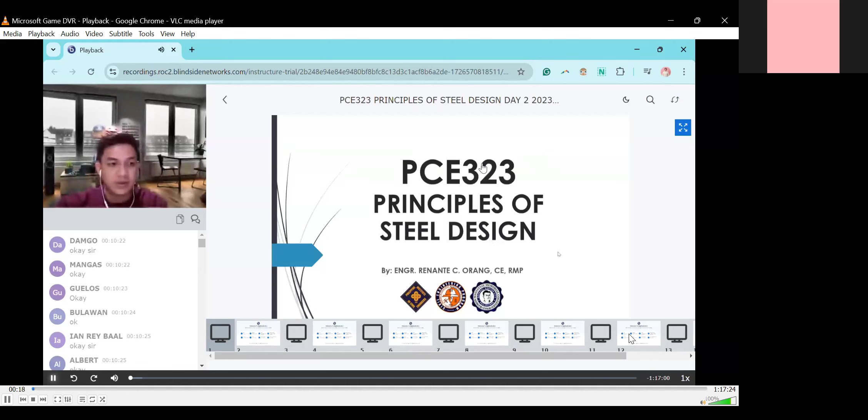Our first topic is shear stress in beams. So we have shear stress and bending stress. You know the difference between the two, but let's start with shear stress.

First is what we call general shear stress, also known as actual shear stress. That is the stress occurring when it comes to shear within that section - the actual stress present because of our weight, self-weight, and the weight that our beam is carrying. It can be uniformly distributed, uniformly varying, or point load. Because of that load on top, we get stress.

Stress is force over area, right? Basically force over area. So for shearing stress, that is VQ over IB - that is our actual shear stress.

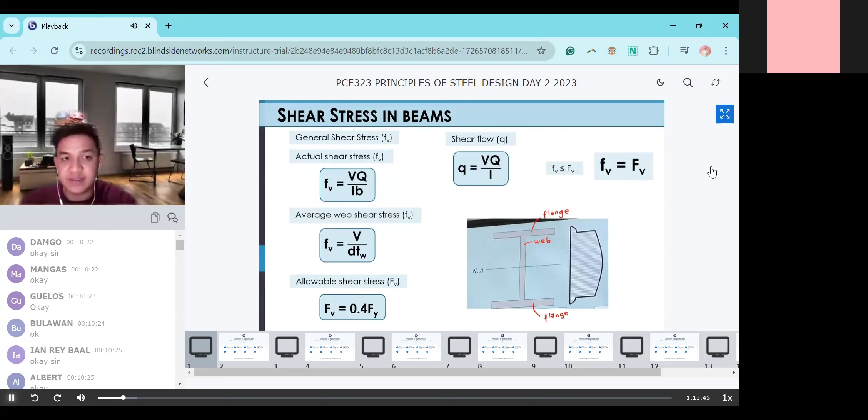So average web shear stress is the stress occurring to our web only. That is V over D - depth times thickness of our web. For actual shear stress, again depending on where you are analyzing, that is VQ over IB.

The problem is, what is the meaning of Q? When you solve it, you'll need this. You know the formula VQ over IB, but you don't know what Q is. Q, class, is A times our Y.

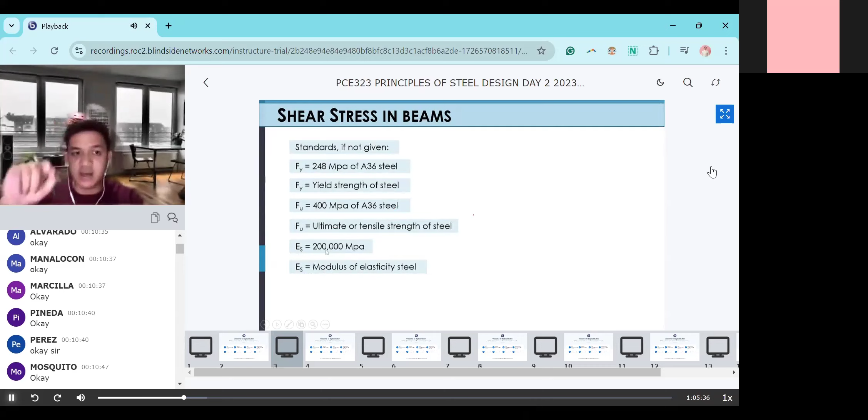Next one is our modulus of elasticity, that is our ES, or in some books just E. This is 200,000 megapascal.

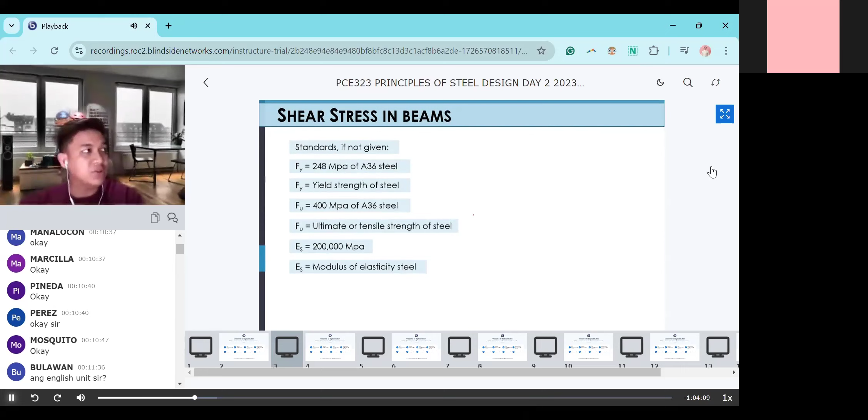So let's proceed. For point load at the center, our maximum shear is P over 2, which is occurring from our supports.

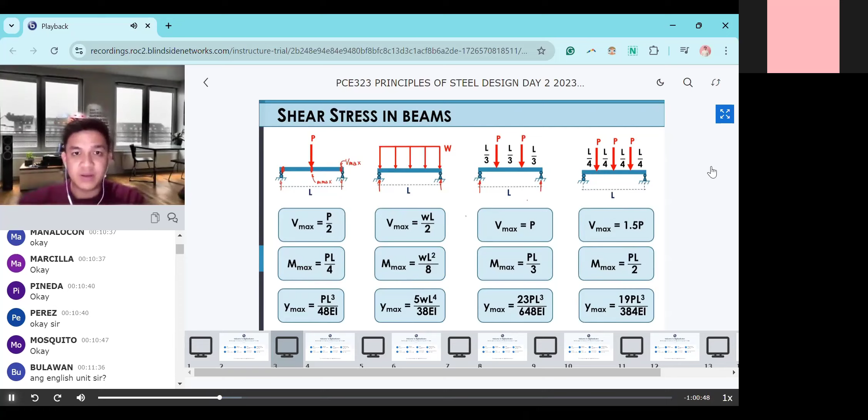Let us proceed with our first example, to apply these formulas. So, a wide flange section has the following properties.

We have BF, which is the length of our flange, base flange. Then thickness of our web, that standing part. Technically the figure wasn't given, so you should know what BF, TW, TF are, since you'll need to draw it yourself. The basic idea is the flange is the top and bottom, horizontal, while the vertical part is our web.

Let's proceed. Thickness of flange is 12mm. Depth, overall depth, is 300. Then IX, inertia in our X, is 108 times 10 raised to the power of 6 millimeter raised to 4.

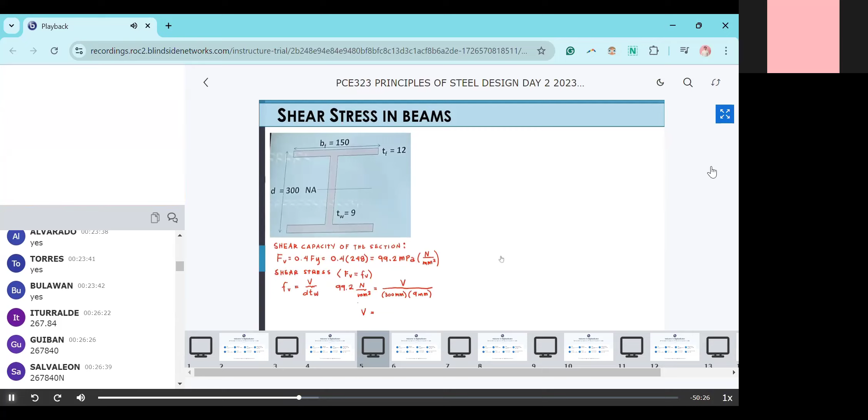Ayan, so based on this, paki-shift solve, what is our V? Ito yung unit ha, para masanay mo. That is 267,840 Newton.

Or pwede natin, for example, sa ating choices, walang Newton, nakakilonewton. So that is 267.840 kilonewton. Siyempre, this will be our final answer. Ayan, final answer. So shear capacity, again, is a force, not a stress. So kilonewton or newton dapat ang answer. Okay, so that's it, proceed tayo, that is for number 1.

Okay, let's proceed. Next: determine the safe uniform load that the section could carry if the length of the beam is 8 meters. Tara na, so nakuha natin yung V na pwede sa kanya is 267.840. What if daw yung ating I-beam is 8 meters? Ayan, 8 meters. Then syempre, meron siyang kine-carry na uniformly distributed load, so what is that safe uniformly distributed load?

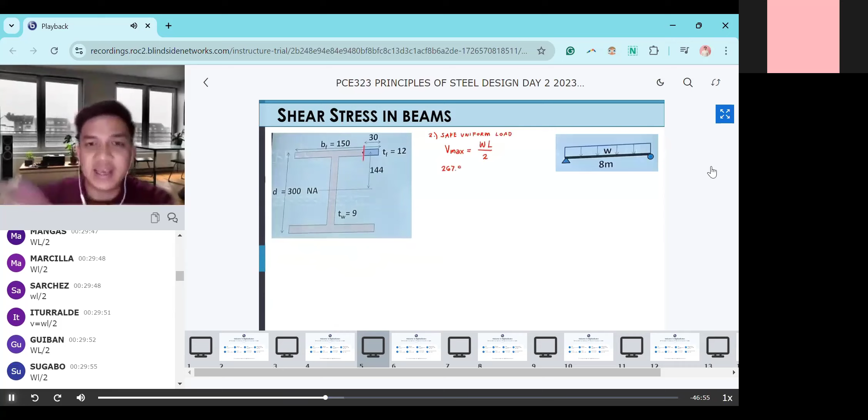We have 267.840 is equivalent to, ito na kong unit ha, kilonewton equals W, length natin is naka meters, 8 meters, tapos divided by 2. What is our W?

Yes, ayan na, even though na nasulat na nako, pwede ragyapon mo mag-type. That is 66.96 kilonewton per meter, that is our final answer. Okay.

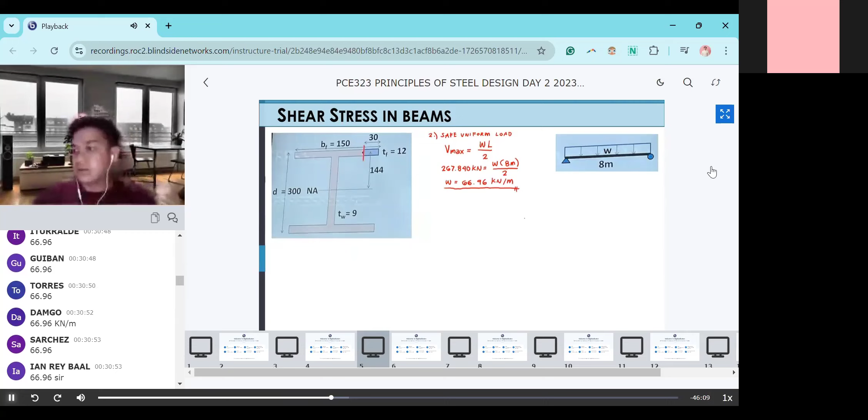Basa akong script. Ala, gilipiwan akong screen kay pangit ang pangit siya sulatan. Okay, sige. But that is our answer.

Number 3 na tayo: determine the shear flow of the portion of flange 30 mm from the edge. Ala to ara, English pa yun. Shear flow, diba? So yung drawing natin from the edge of our flange, again, ang flange is eto, tumoy ba sa taas? Flange, web. So from our dulo or edge, 30 millimeters, so what is the shear flow?

Okay, sulat natin number 3: shear flow at neutral axis. Ay, number 3, swap, okay sorry. At the shear flow of the portion, swap din akong sulat, of the portion, 30mm from the edge. Yan, that is number 3.

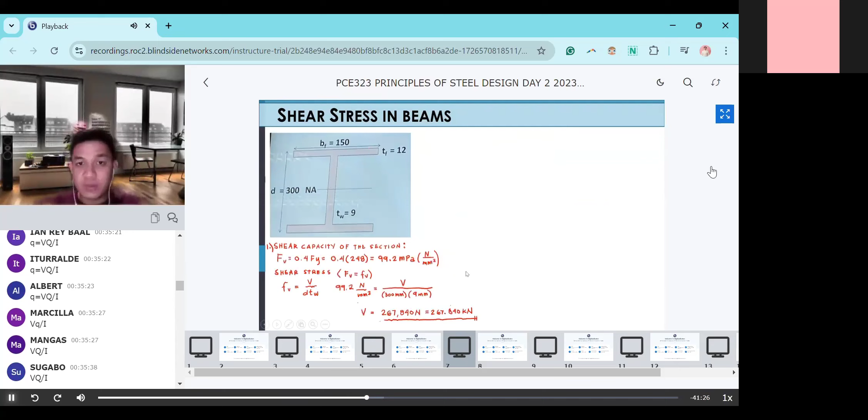So if you are talking about shear flow, class, we have our shear flow diagram. Ibig sabihin, ito yung stress when it comes to our shear of our I-beam, no? As you can see, kani baga manggod siya, taas siya ba, baga siya kung pa-horizontal. Siyempre, maliit masyado yung shearing stress dyan. As you can see, ito yung zero natin na part, 0.

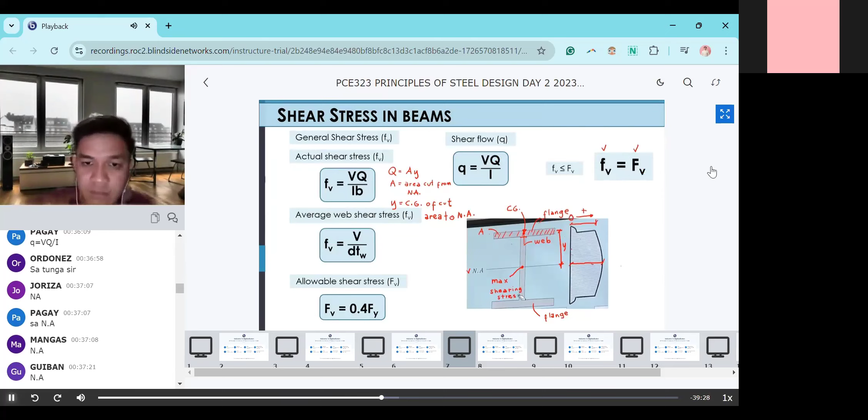That's your clue for next, if you know where. Yes, at the neutral axis. Okay, let's proceed again. Let's start with shear flow at the neutral axis. We have VQ over I.

Our Q, class, that is area times Y. But in number 4, the Q was already given, right? Here, Q at the neutral axis is 380 times 10 raised to 3. So that's what we'll use.

And this is also our final answer. And we're done with example number 1. Numbers 5 and 6, that is your practice problem, so you need to practice that one. Then maybe next time, we'll go back to it if we have time. Next meeting, not right now.

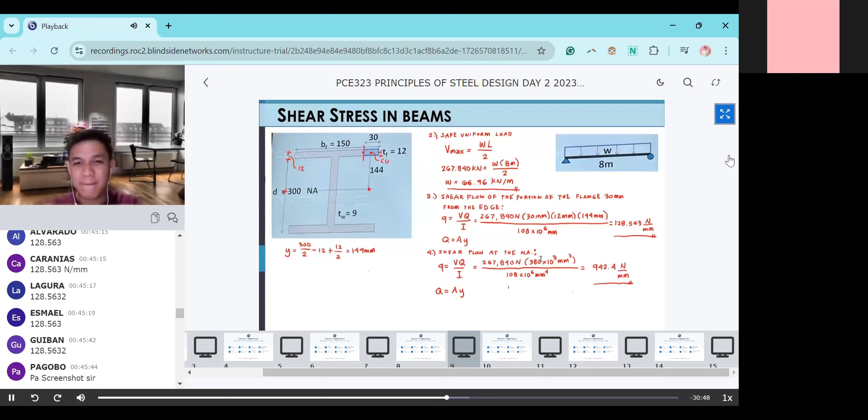So a simple beam has a span of 12 meters and supports a superimposed uniform distributed load of 20 kilonewton per meter. This is like the self-weight or the load that the beam is carrying.

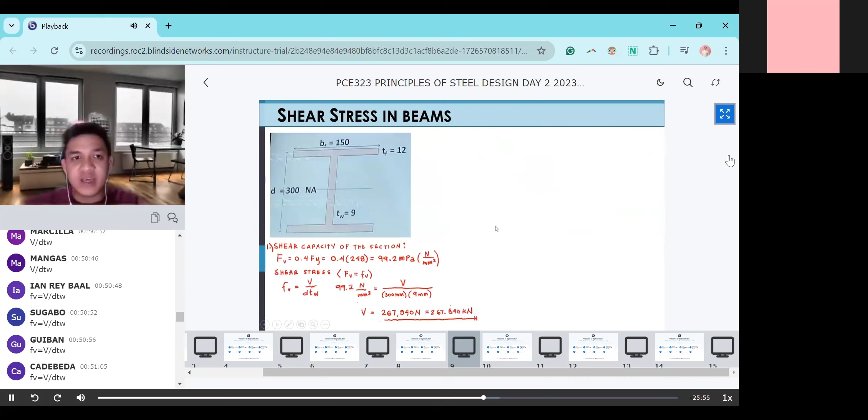When we say average shearing stress, please type in the chat box, what is our formula? Yes, that is FV, actual, equivalent to V over d times tw. So what we're missing here, we cannot proceed because we don't have the value of our V. Again, average shearing stress means actual, not allowable, actual.

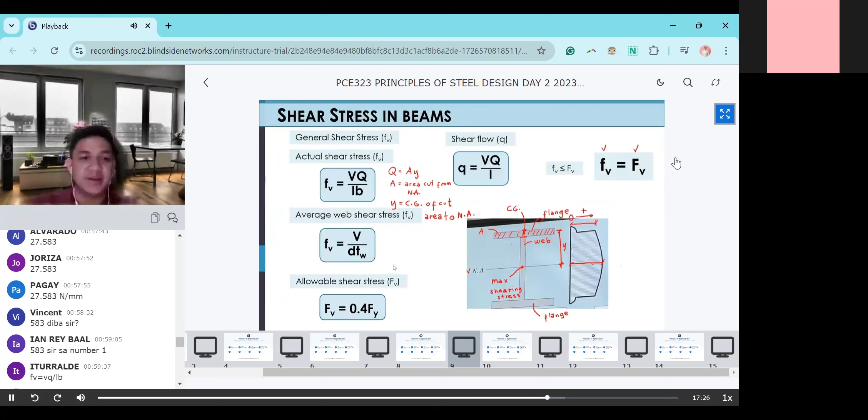Apas, that is VQ over IB. Number 2 na ta.

Maximum shearing stress. So, ang maximum shearing stress natin, class, is small letter fv is equivalent to VQ over IB. Wala na, unsa man eh. Sa kuha ni class, slide akong screen. Ayan, so VQ over IB.

Problema, meron na tayong V. Kaya na ka ng V. Kaning V na to, ganina, pwede na na, 124.112. Ang Q, wala pa. Then yung I natin, meron, no, gatag man. IX ang gamiton, dili IY ang gamiton. Within our x-axis atong irespetuhon.

Okay? Tapos, B is, kumbaga, kung saang thickness sa web. So, mo ng G's lang na siya. So, ang problema dito is yung Q natin. So, Q sa itong unahon para dito maglisod. Q is equivalent to, wait lang ha. Kanang oily na akong screen. Q is equivalent to A times Y.

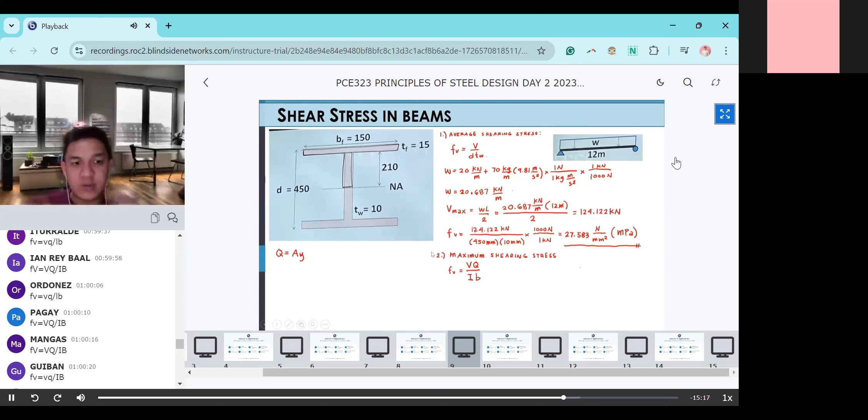Then syempre, maximum shearing stress tayo, diba? We are analyzing kung saan yung ating maximum. So ang maximum, syempre, asa ga-occur. Asa? Dali, sa part niya. Tungaon lang nato kay maglisod man tag iisa nato, no. Pwede man ta mag-Varignon's theorem, pero para dire-diretso save sa nako kasa.

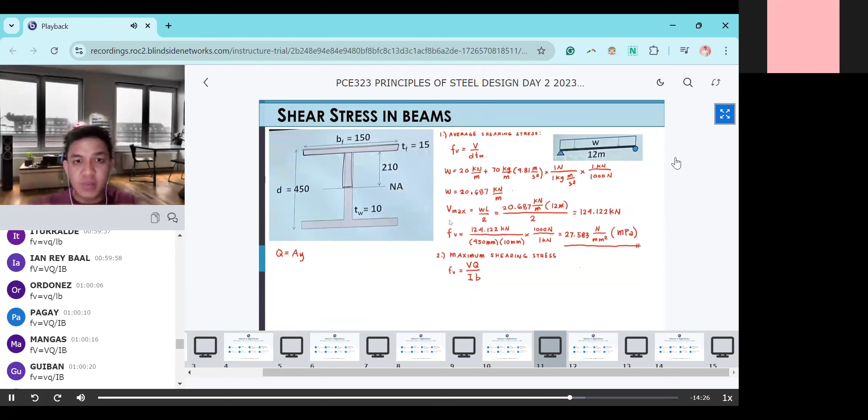Okay, again na, maximum shearing stress, syempre, that is kumbaga occurring, itanan nimo, pwede po tanan nga literal tanan. So lahat ng nasa taas ng neutral axis. So para pag-analyze natin, mas madali siya i-analyze, i-cut natin into two sections. Ito na section, yan, and then ito na section.

So yan yung hahanapan natin ng Q, our first and second area. So first ang number and second area. So sa first area, saan pagkuha sa area ana, paki-type daw sa chat box. Blank times blank. Parang gana po din ng utok. That is, yes, that is simply 150 times 15.

Area pa lang na. Next is Y, diba? Butang dot ha, dot. Mo ni ang center of gravity sa atong area 1. So yung hinahanapan natin ng, i-reso na lang na ako. Ito na itong A1. Ano?

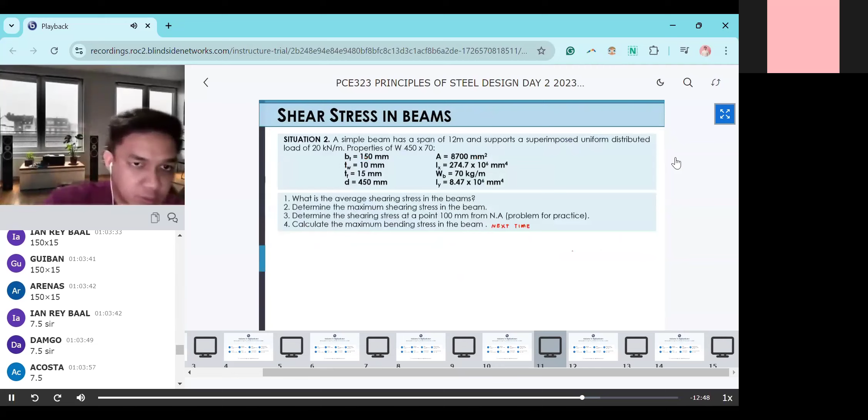Y1 plus A2 Y2. Hala, pwede ito maglibog. So A1 natin is equivalent to, yun sabi ninyo, 150 times 15. Tansya klasa, ba't naon sana niya kong screen?

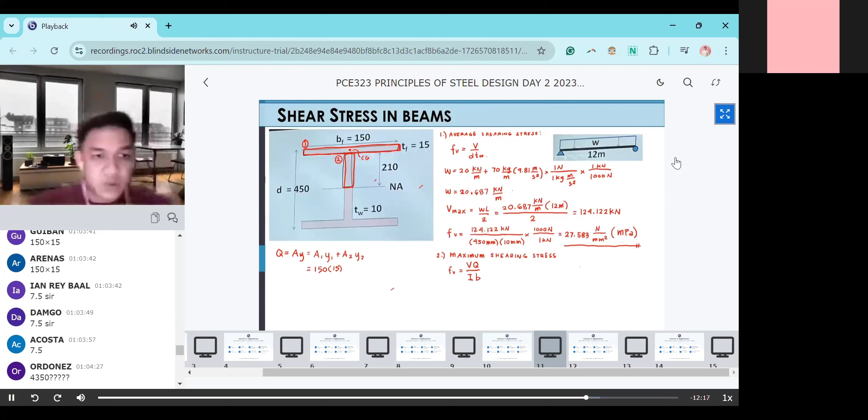Okay, tapos, what is our Y1? Pilin ninyo. From this point, di ba? Sa pining. From this point, papunta dito sa center niya. So ang pag-compute...

Isulat na ko ha, sige. 450 divided by 2, diba? Para katunga. Mag-minus din taog 15, tama? Para diri siya taman. Tapos mag-add na pod taog, same kaganina good niya style, 15 divided by 2. Sabtan man ha, pero again, if kaya nimo matamatahon, pwede ra pod. Isulat lang nako para makasunod lahat. So that is our y1.

Nalangan to sa sige lang, last naman eh. Nalangan ko sa akong screen. Na? Tapos, plus. Sa tingin ninyo, class, what is our area 2? Blank times blank.

Okay, 217.5. That's correct, that's the solve for that.

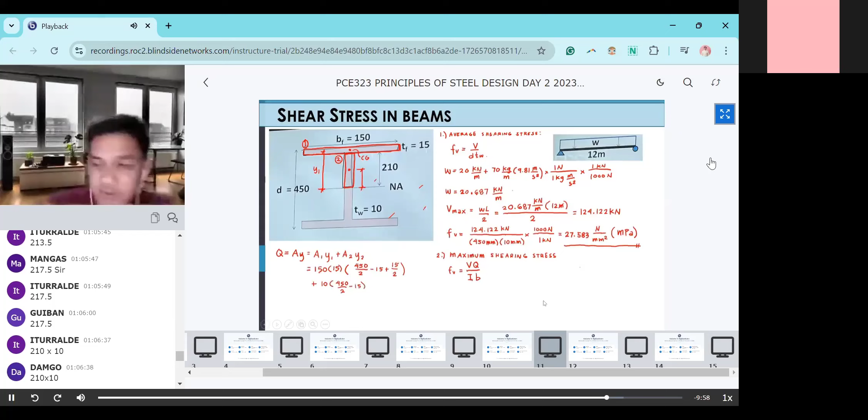So now area times y2. The y2 is from this point going to its center of gravity. How do we compute it?

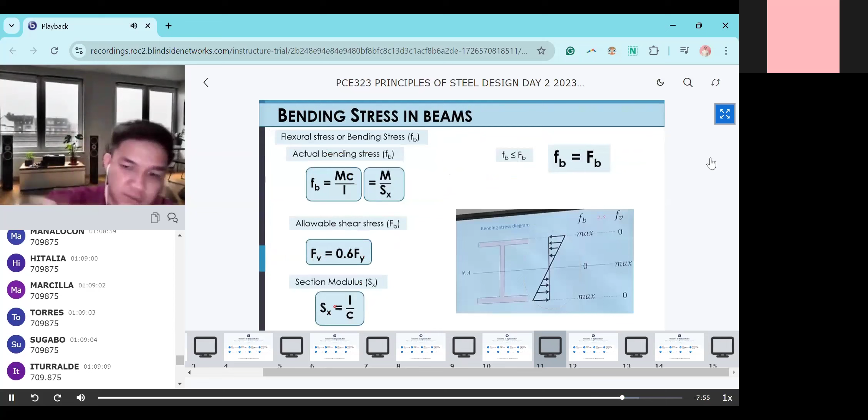709,875. Okay, last one. That is 709,875. The Q is in millimeter cubed.

Okay. So our V, we already solved earlier, that is 124... 122, no, Newton, not kilonewton. So Newton times Q, that is...

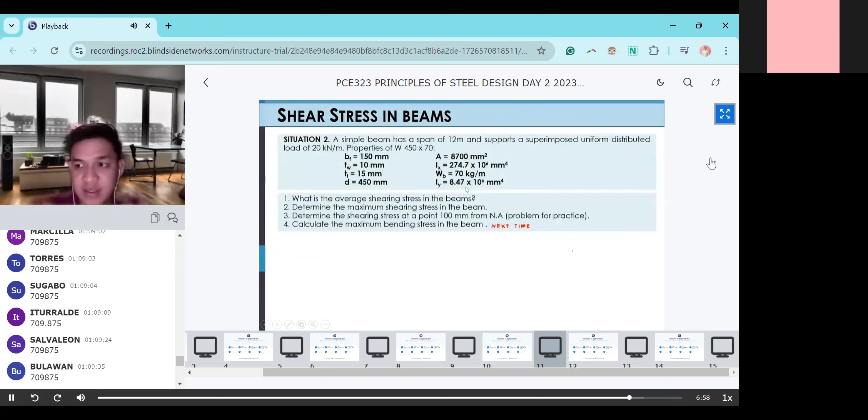709,875 millimeter cubed. Then divided by, sorry for the confusion, what we'll use is IX, so that is 274.7 times 10 raised to the power of 6 millimeter raised to 4. Is that right? 4.

Then our B, the thickness of our flange— web, pala, sorry. 10 mm.

Let me define it so you don't misinterpret it. Our B, class, is the thickness at the neutral axis, the thickness at the center of gravity of the area we are analyzing. So meaning, class, we have area 1 and area 2, and they have different centers of gravity. But since we treat it as one when analyzing, it has a combined center of gravity of the two.

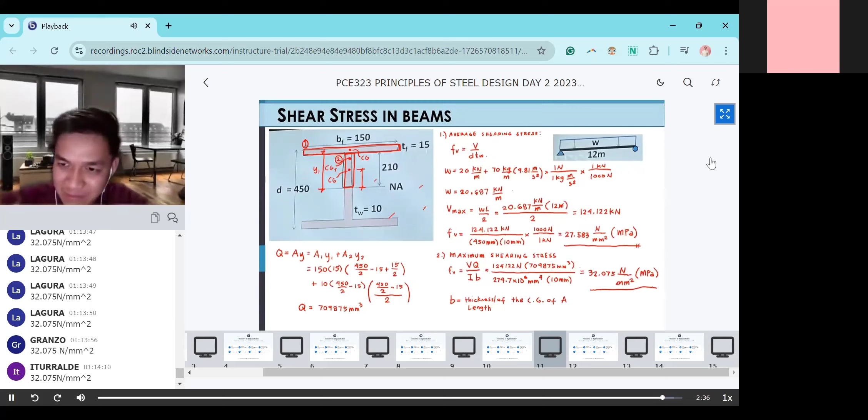Sorry about that, class. Where's the write-up? There, final answer. Okay, that is 32 point... Newton per mm squared or MPa. Okay, let's save this before it gets lost.